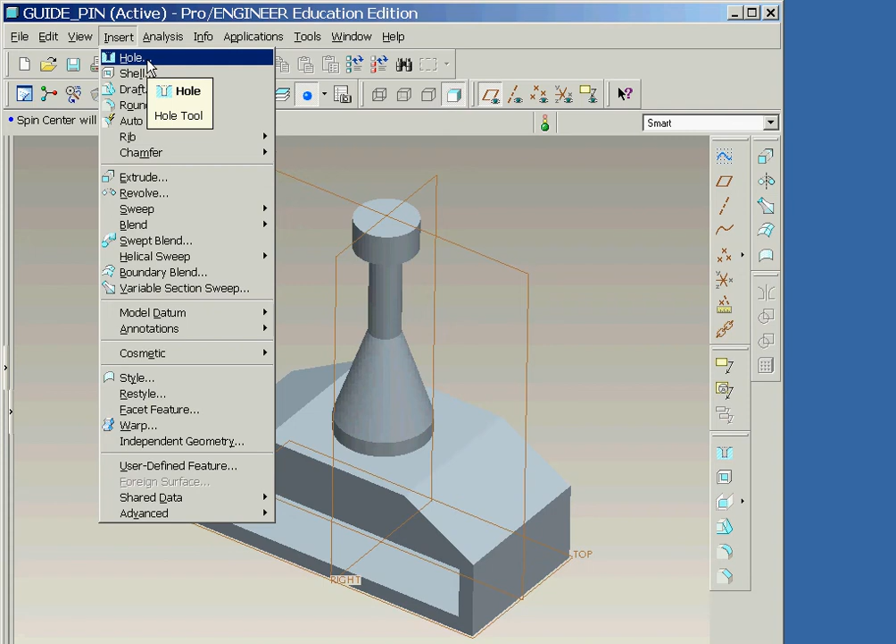During this session, we will add several different features to finish out the guide pin part. We'll begin by adding a hole on the inclined surfaces of the base. This time we'll make use of the pull-down commands, Insert, Hole, and then make sure that Straight is selected as the hole type in the dashboard.

We will now click on the inclined surface at the approximate location of the center of the hole. Using the drag handles, we will now select the front datum plane as a dimensioning reference and the upper edge of the end surface as shown here. We will now click on each of these dimensions and set their values to 3. And then change the diameter dimension to 2.

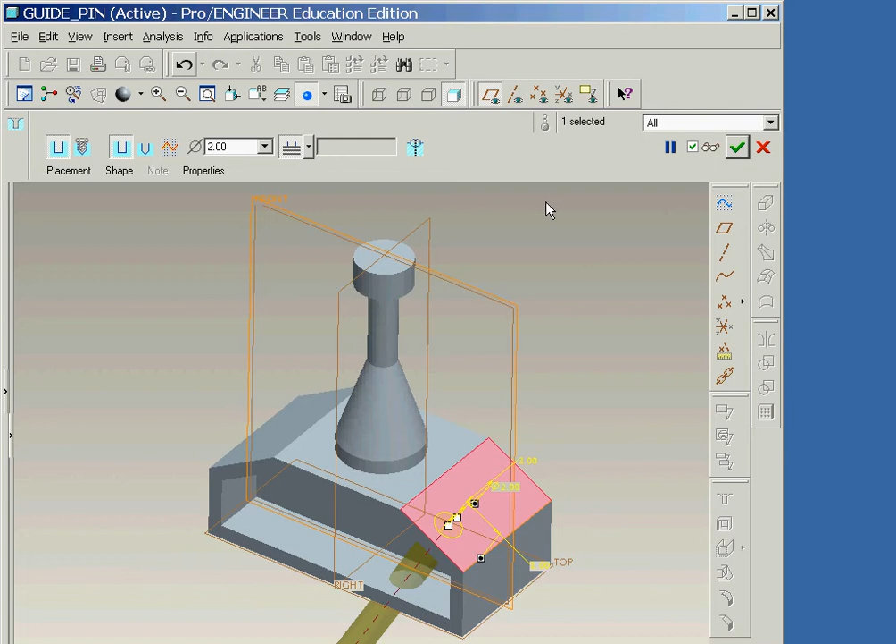In the depth specification area of the dashboard, we'll change it to Drill up to next surface. Then we'll click on the Verify button, followed by clicking on the check mark icon. Now that we have the first hole, we'll use 2 different copy operations to create the other holes. This is the same technique that was used to create the second pocket in the previous session.

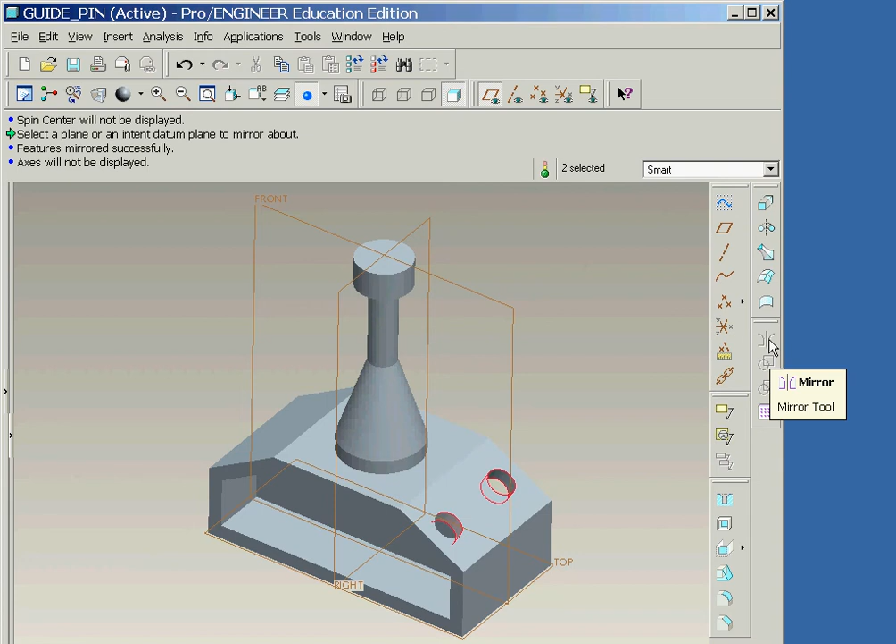Our first copy operation involves mirroring about the front datum plane. And then our second copy operation, which will copy both of the holes that now exist, involves first selecting them both by depressing the Control key while clicking on both holes, and then mirroring about the right datum plane.

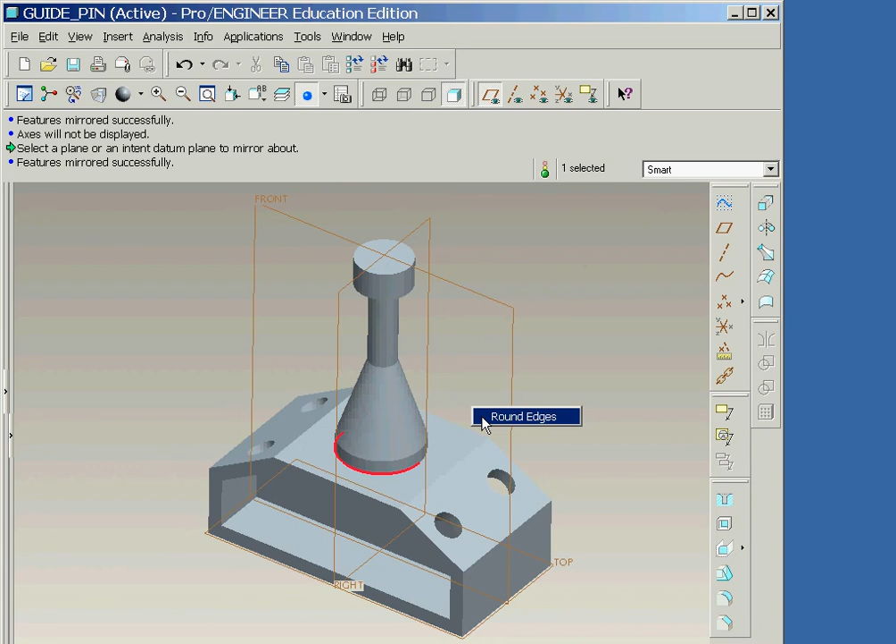We will now add a fillet where the shaft meets the base, and then round off the edges on the top of the guide pin. Pro E uses the command round for both of these operations. We will start with a fillet by first pre-selecting the edge where the revolved feature meets the base. And then click the right mouse button and select the Round Edges option. Now we'll set the radius to 0.5 units. And then click the middle mouse button to finish.

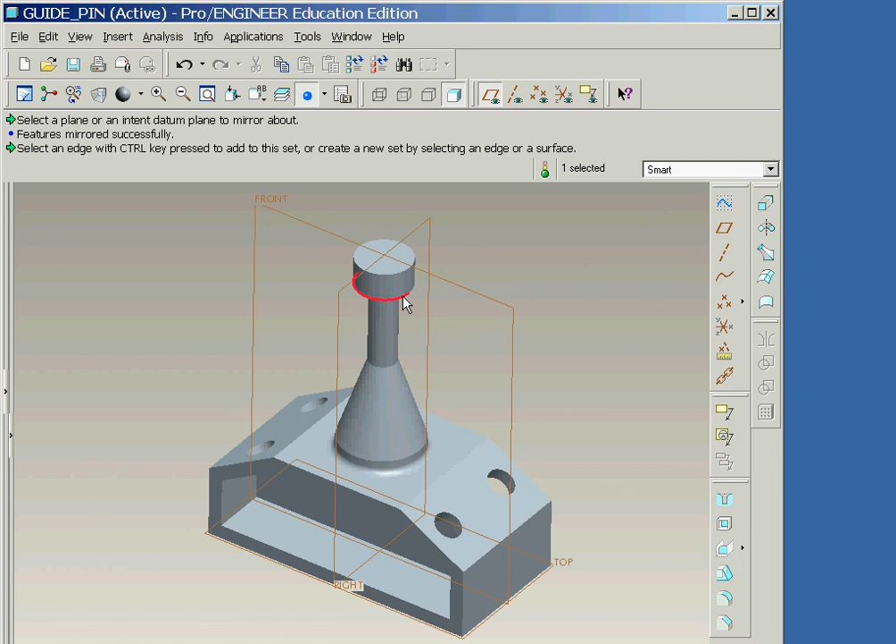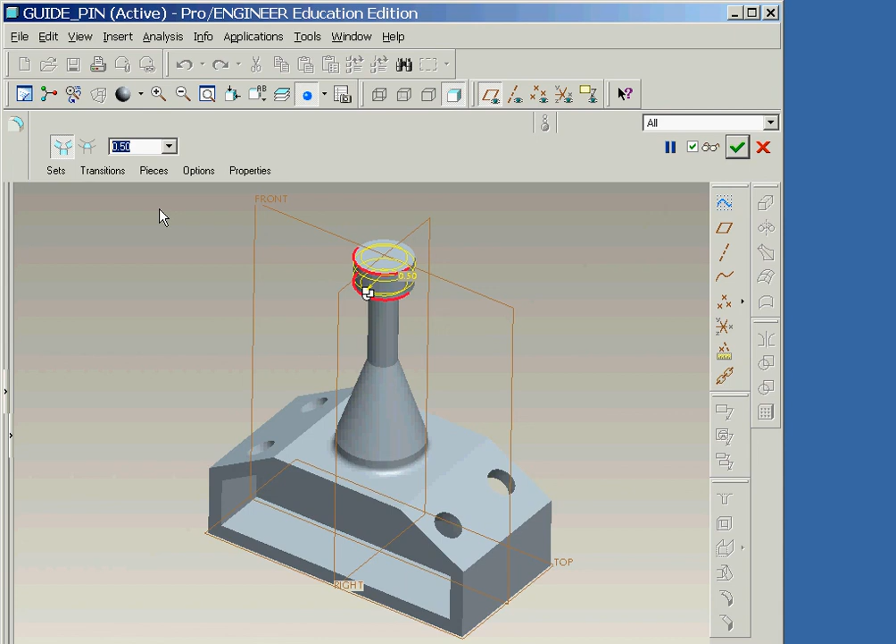The rounds at the top are created in a similar fashion. However, this time we'll select the edges while holding down the Control key, which allows multiple edges to be selected. Then we'll click the right mouse button and select the Round Edges option. Now the radius value is set to 0.5 units. And then we will click the middle mouse button to finish.

The final feature that we will add is a chamfer all around the side edges of the part. We will start by clicking on the chamfer icon. And then we will begin clicking on the edges of the pocket while holding down the Control key. After the last edge is selected, we'll set the chamfer size to 0.25 in the dashboard.

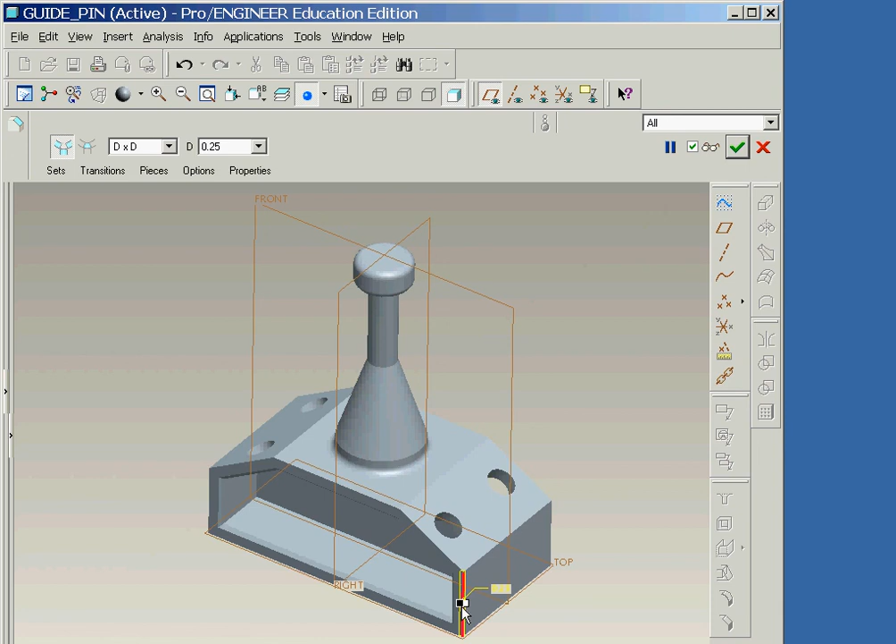We will now start the definition of a second set of edges by clicking on the edge shown here without holding down the Control key. And then holding down the Control key again, we will click on the other edges. And then finally, we'll verify and accept the chamfers.